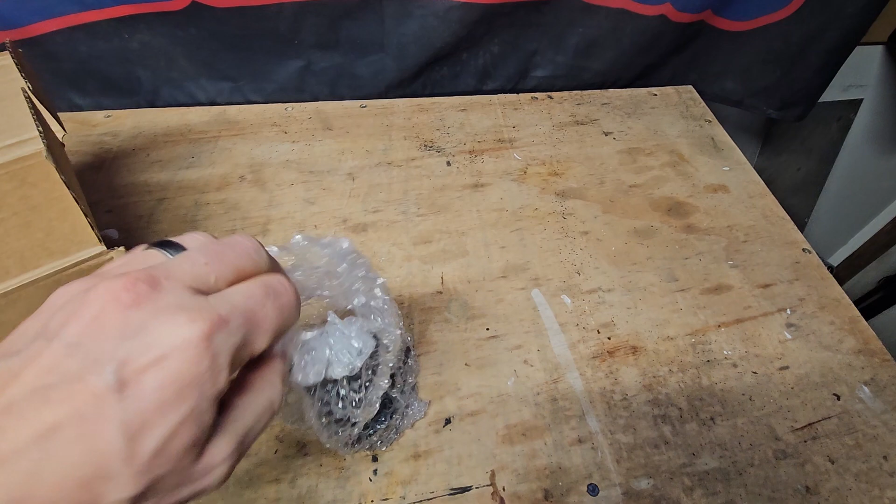So I've ended up purchasing, doing a bit of research into it, handlebar risers. So purchased these. These actually came from the UK. I think they're about $230 odd landed. So we're going to be installing these on the bike.

So the idea is the clip-ons will come off, and this will then go back on, and then the clip-on sits on here, so it gives us a bit of a height adjustment. So let's head up to the bike.

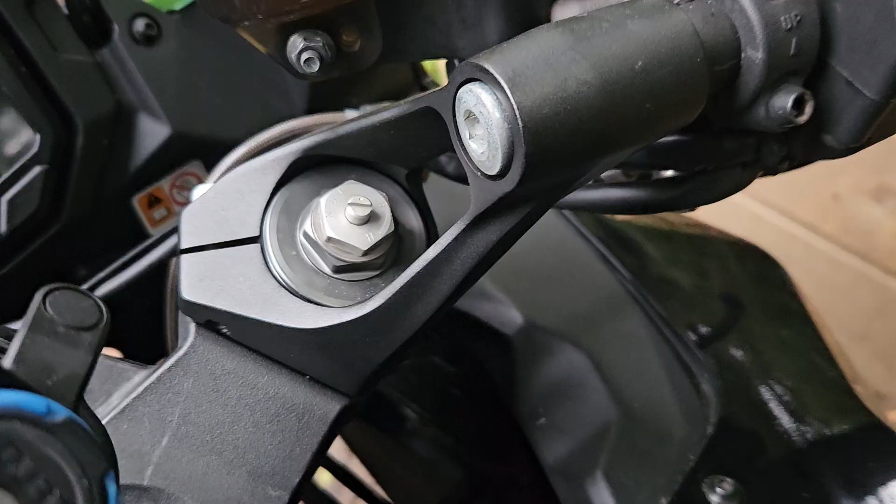So here we've got the clip-ons, and what we're actually going to be doing is removing this bolt here. Don't know if there's another one on the side. There might be another one on the side down there. Oh, yep, we can see it through there. So that's got to come out as well.

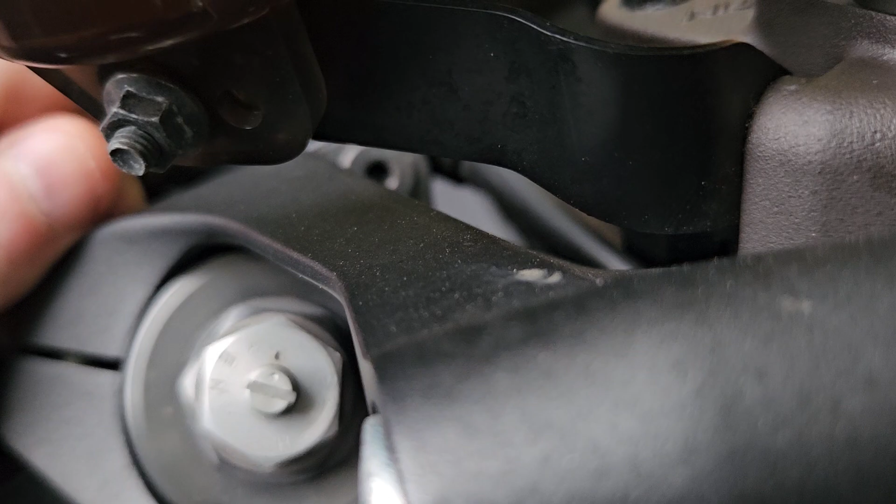Then this whole clip-on comes off, and then the riser goes back on there, and then this goes back on. Now, one thing that I've been told is I'll lose my adjustment here, because obviously I won't be able to access it.

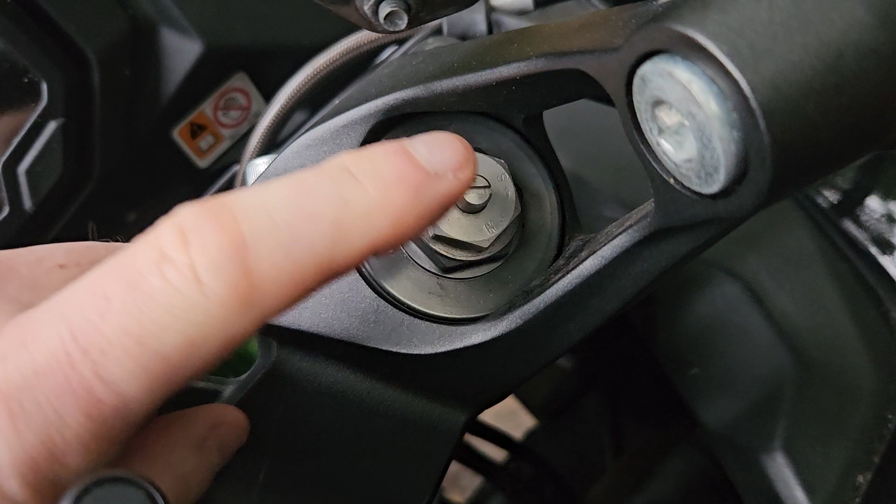So, just interrupting this, as you'll see later, I'm actually incorrect in saying that you lose the adjustment. You can still actually adjust the front suspension, as you'll see later on. Alright, back to the video.

To be honest, I've had this bike for 4 years, and I've never adjusted the suspension. I ride it on the road, I don't take it on the track. It's kind of just worked for me, coming out of stock. Have had a mechanic adjust my rear, but I've never done the front, so I'm not really going to be losing anything, I think. If it's something you do adjust regularly, something to think about.

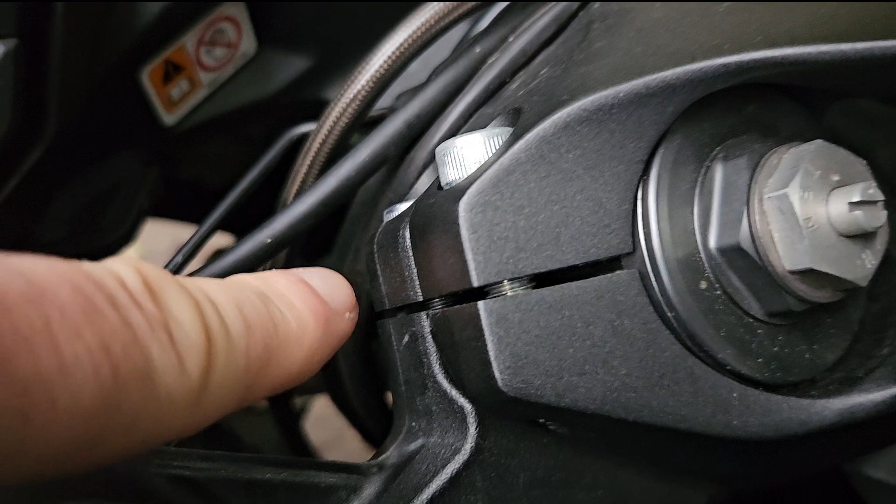Now, I was going to make a marking for the alignment, but I just noticed the actual standard clip-on, you can see the gap there, and then also down there where it clips onto the triple clamp, is it? Oh, whatever it's called. Anyway, and also the riser's got one there too. Now, there is a left and right of these, so make sure you're using the right one. So it comes with both.

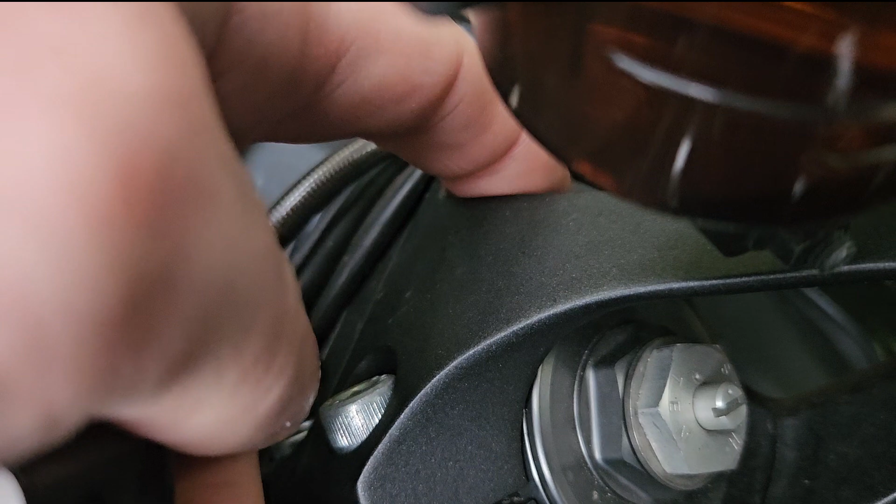So what I'm going to do is take this bolt, it's only the one bolt. That bolt isn't for the clip-on. So there's that one, and then that one we've got to take off. I think it's that one. Where'd it go? Yeah, that's it. So I'm just taking this side bolt off, and you'll notice my spanner here is very close. It's pretty much touching the brake reservoir.

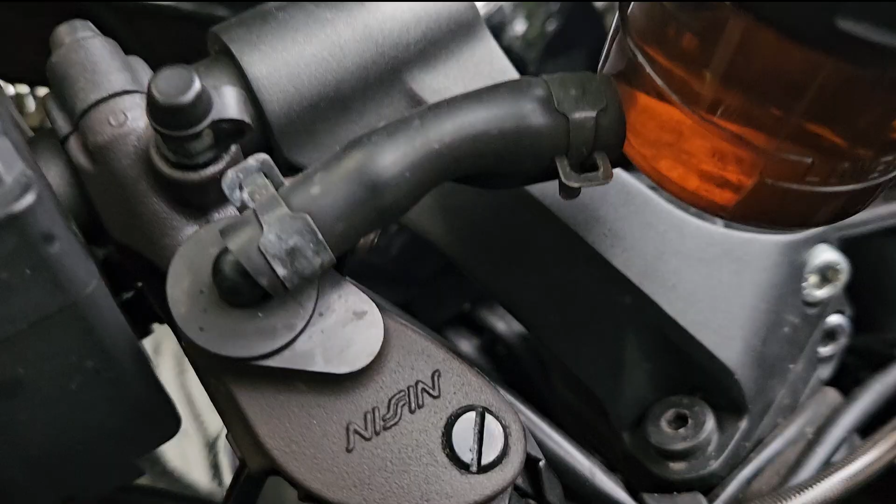So depending on the size of the spanner you're using, got them all over the shop today, you may need to take the brake reservoir off, which is only one bolt down there. So I'll just keep going and take this part off. Actually going to take the brake reservoir off. It's just going to be easier to get to that bolt there, and also when putting on the new one, I think it's just going to make it easier.

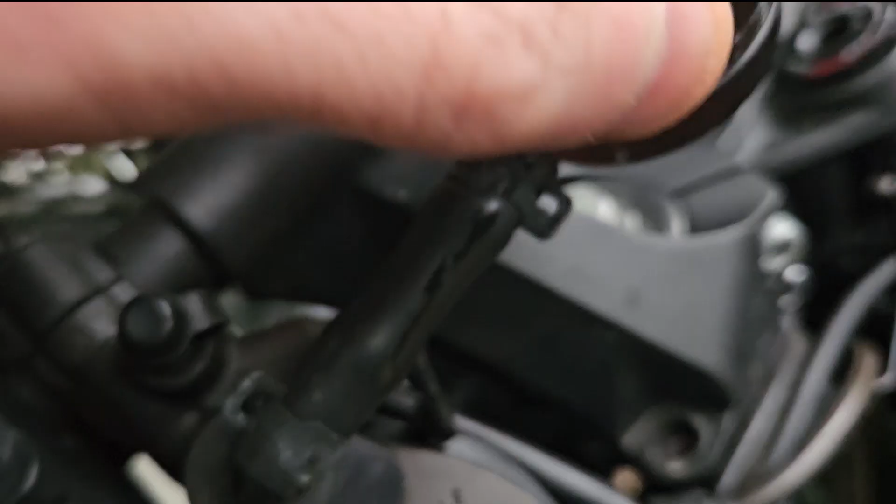So I'm just going to undo this, just there. Okay, that bolt's out. You can see this is loose, so that's fine. There's no problem there. Interesting to note, the bolt's got red Loctite on it, so make sure I put Loctite on the other one. Now we're just going to take this bolt off here.

Okay, that bolt's out, and you can see that is now loose. Oh look, it's coming straight off. Alright, I'm going to take that off. Be careful though when you take it off, there are still a buttload of wires and cables connected, so you don't want to damage anything.

Let's take that off now. Okay, you see that's off there. I'm holding this, I don't want to drop it. Have to figure that out. I'll get the other piece on shortly, the riser.

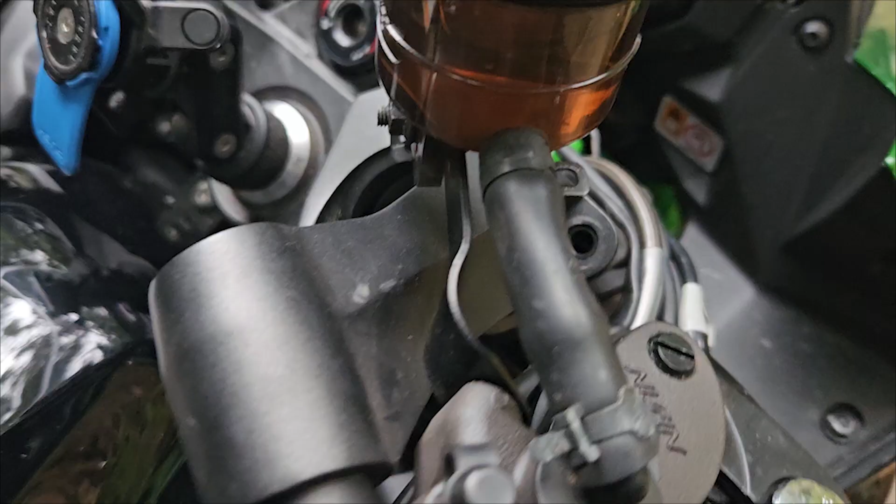Okay, so I've got that mounted now, and I've been told that the cables don't need an extension. They all do look a little tight, but having said that though, these are all electricals, so that's not an issue. That one's obviously the brake. I just have to make sure they're not too tight, but I've got to tighten this up first.

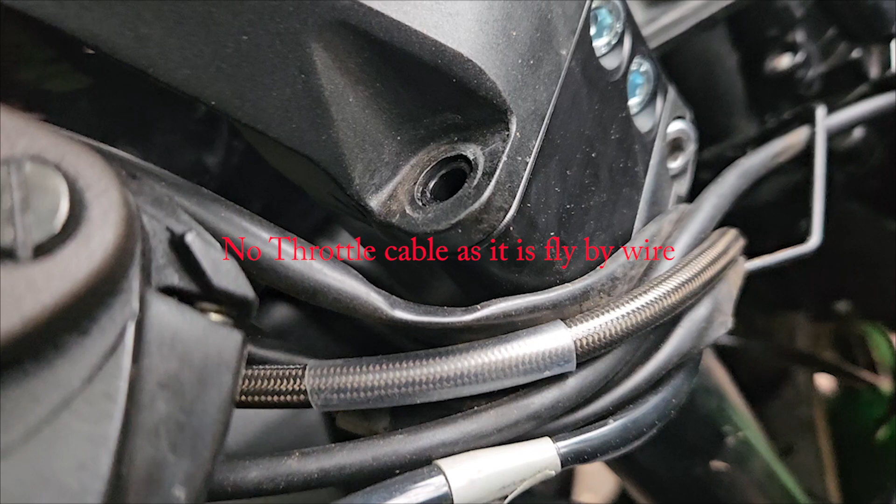Also of note, I took the little black plug out, so I don't know if that can fit in there. Oh, it can. How about that? So I was wrong about that not having adjustment to the suspension. So you can actually still adjust it. As I said, I've never done it, but the option's actually there, so I stand corrected. That's pretty cool. I've read other reviews where people are saying it's blocked off, but clearly it's not. So they must have thought about that.

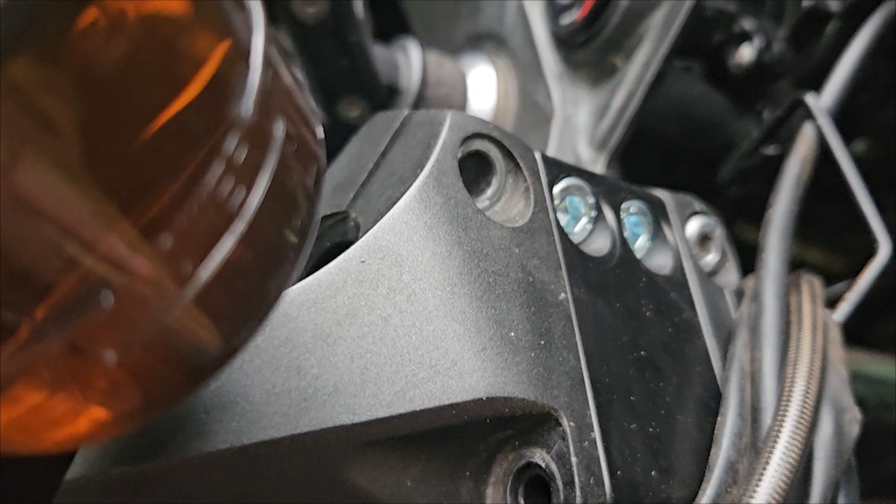Alright, now I'm going to tighten this up. So tighten up the bolts here, tighten up that one. I'll have to check the torque specs as well, obviously. So I'll get that happening, but I'll start on that.

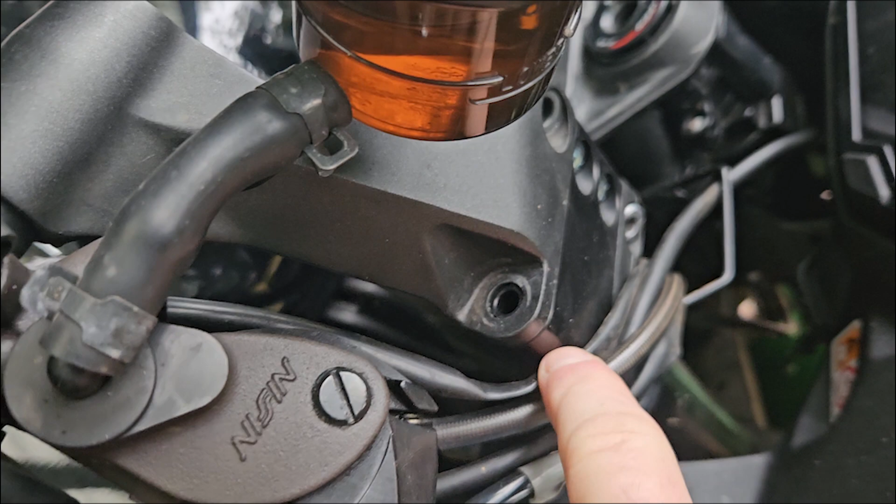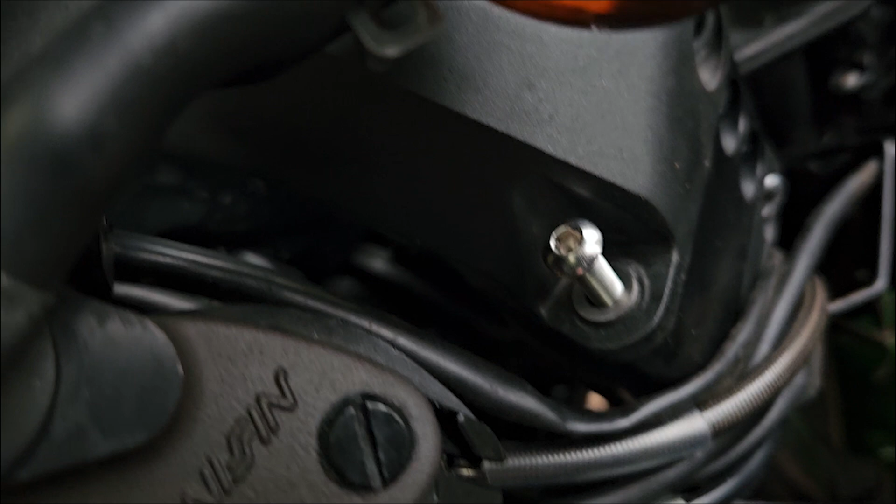One thing I forgot to mention, obviously the bolt that was in here with the risers is now not going to fit. So the actual kit comes with these two replacement bolts, one for each side. So that will just go in like that, and obviously get tightened up. Oh, and I'm going to put Loctite on it too, forgot about that.

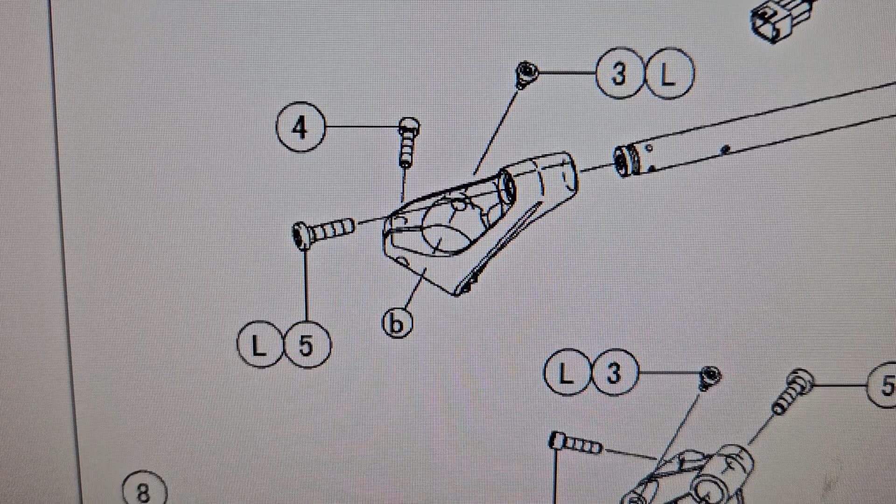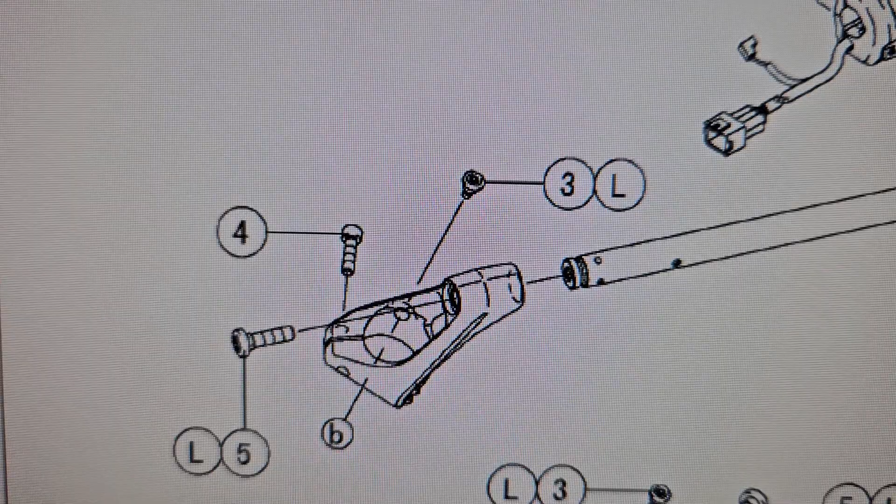Alright. So this is from the workshop manual. It's actually the slightly earlier version, 2017 to 2020, but it's the same thing. So you'll see bolt 3 and bolt 4 are the ones we want. And you'll also notice 3 has the L, which means it has to have Loctite.

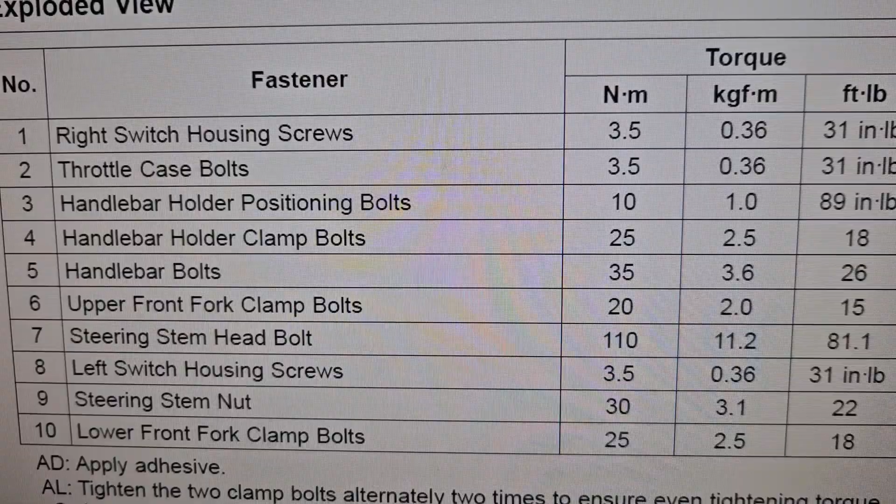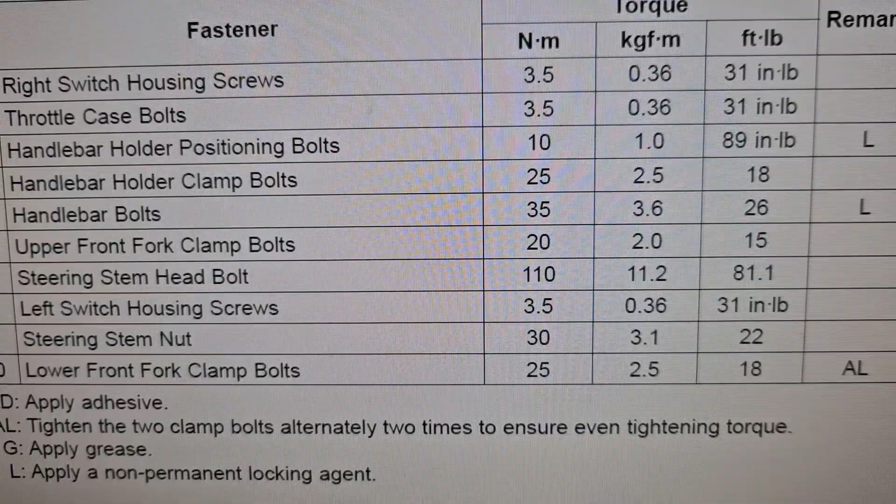And the actual settings, if I come down to here, so 3 is 10 Newton meters, or 89 inch-pounds, and number 4 is 25 Newton meters, or 18 foot-pounds. I use Newton meters normally, so that's the torque settings.

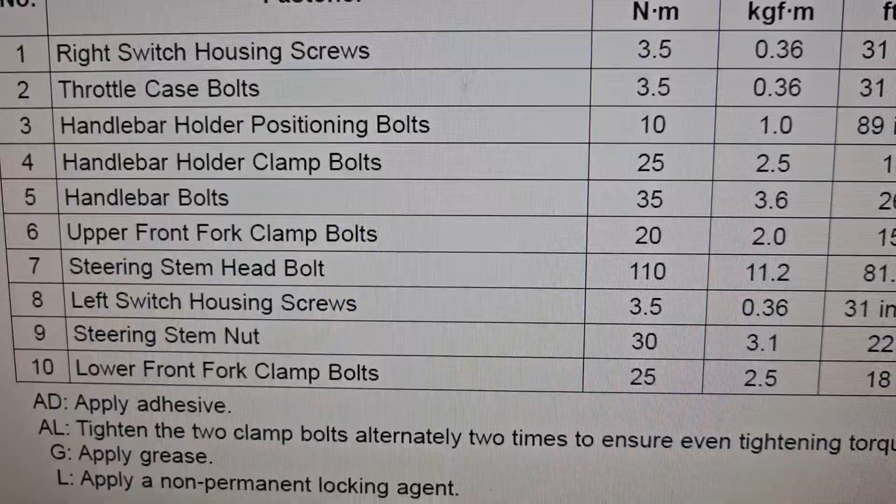Okay, so I'm going to put some blue Loctite, which is the non-permanent one. Put that on the ends, and then we'll seat that bolt in. Okay, I've got the torque wrench now set to 10 Newton meters for this bolt, so we'll put this in. Okay, and these ones are going to be set at 25 Newton meters. This one, and that one.

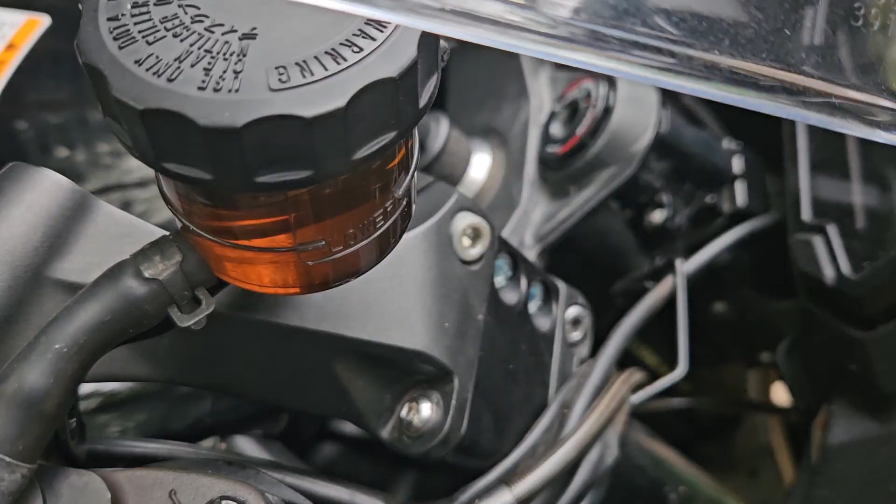Okay, so this is now done, attached. Got the black plastic cap in there. Bolts are all done. You can see that's also lined up the whole way through. There's a bit of movement here on the cables, which is good. It goes lock to lock. It's fine.

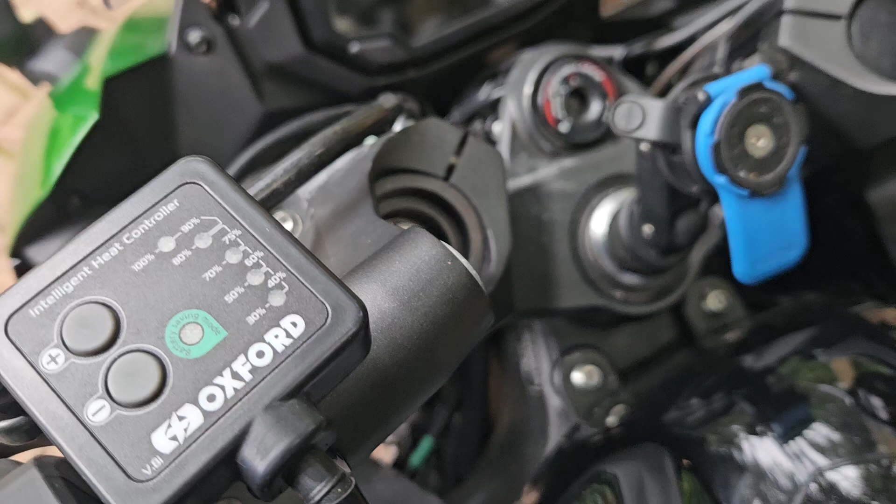So that's that side. Now I'll go to the left side. I won't take you through the whole process, only because it'll be the same. So I'll just skip to the main parts. Okay, I've got that one off. Now I'll put the riser on. And there's the left hand one installed. Just notice those cables have been rubbing up there, but that's just normal, I think. So I'm just going to put the cap on.

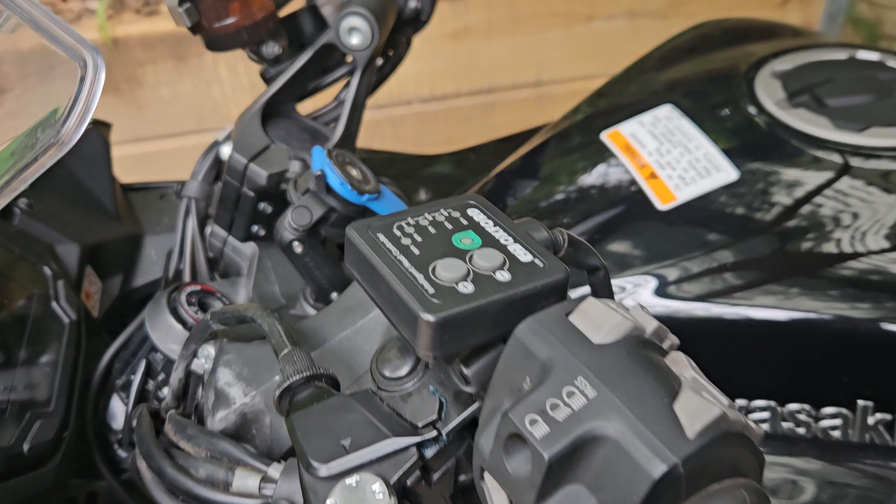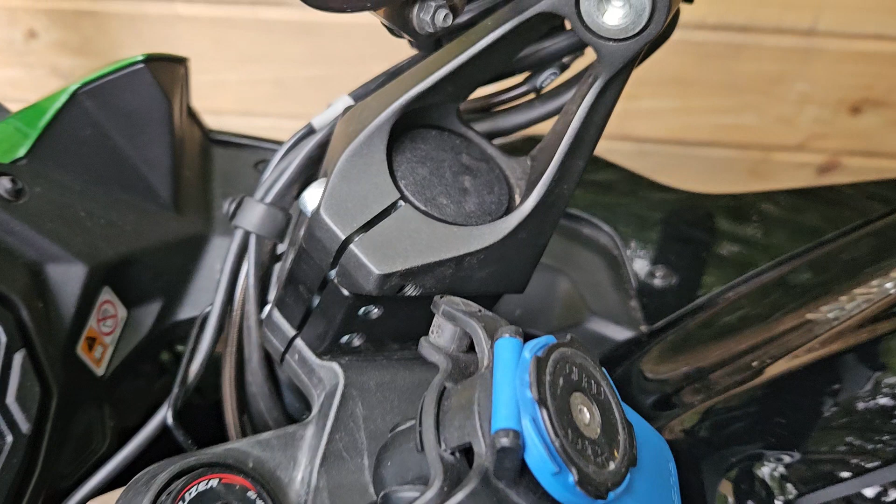You can definitely see a difference. The actual handlebars too are sort of swept back a little bit more. I think that's just the height bringing it up. They've gone on very easily though. So I've just had a sit on my bike. Definitely noticed the difference. Feels much more relaxed, which is fantastic. It's a really nice design actually.

I mean, yeah, you can tell it's not factory, but I reckon if someone was looking at this that didn't know otherwise, they wouldn't know any different. So very impressed with the finish. It looks great. So I'll have to go for a ride and test it out, but I reckon it's going to be good.